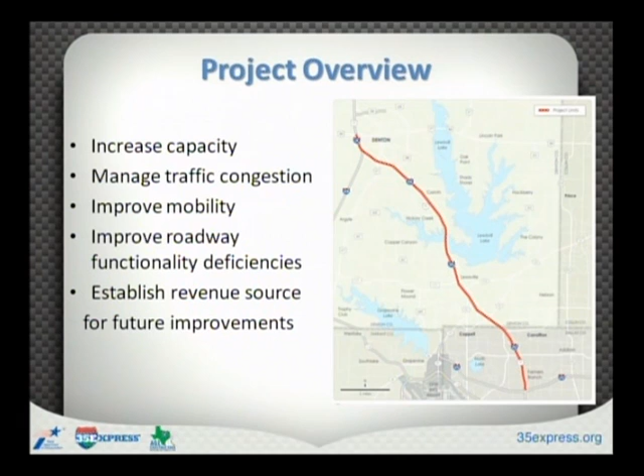Well, we all know that we are growing tremendously in this area, and our transportation infrastructure has to be upgraded to accommodate this growth. So the main purpose behind the 35Express project is to expand capacity, increase mobility, and also give us another way to fund improvements to our transportation system. We can't do this alone. We run through 2 counties and 8 cities, and we're working very tightly with them. We also work with the Federal Highway Administration, the U.S. Corps of Engineers, and the North Central Texas Council of Governments.

Now, this project is about 30 miles long. If you've seen me do this before, we've increased another couple of miles because we've got some additional things to build, which is going to be on this end of the project. We'll be building general purpose lanes, frontage road lanes, and of course, the reversible managed lanes.

Now, I know that you hear a lot about Phase 1 and Phase 2 construction. Phase 1 and Phase 2 are the same project limits, which means we're going to be building between 635 and US 380 down in Denton. However, Phase 2 is going to be built after Phase 1, and that means after funds have been identified. AGL Constructors has been contracted by TxDOT to construct Phase 1.

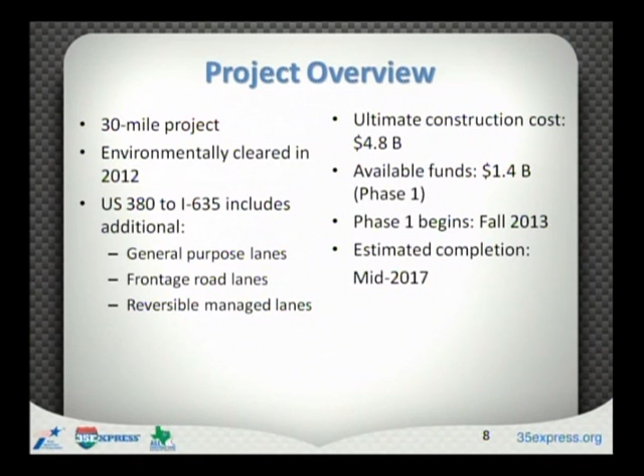If we were able to construct what we needed to do with I-35, it would cost us about $4.8 billion. We've only identified $1.4 billion of that cost, so we're doing those improvements in Phase 1 of the project. We should be beginning construction in the next few weeks and should wrap up about mid-2017.

What are managed lanes? Managed lanes are just basically toll lanes. They're going to be similar to your HOV lanes. With the managed lanes, you can have a 1-passenger car versus with the HOV lanes, you have to have 2 or more people in the car. When you're riding in the lanes during peak hours, it's more expensive to ride.

They are reversible, so it means they go one way in the morning and another way in the afternoon. We will have 11 different access points for people to get in and out. There's also shoulders for those who may experience car trouble while in the managed lanes. And then we also have perches along the way for law enforcement to watch traffic.

I'm going to go through the project a little bit. I'll go from north and then I'll hit south because I know that that area is a little bit more important to you. The north segment of the project goes from US 380 to FM 2181 or the Swisher-Turbeville area.

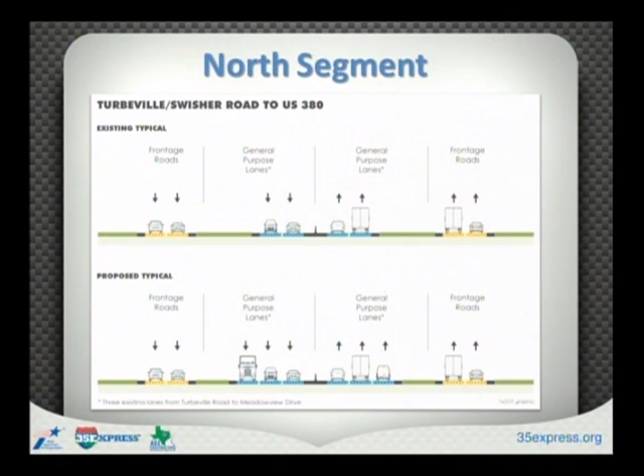There are not any managed lanes in this particular section of the project. At the top part, you'll see there's 2 lanes in each direction, and the bottom part is what the configuration will look like once we complete construction.

For the north segment, we'll be doing lots of new bridges. With this project, we touch about 75 bridges. Either we are rehabbing, reconstructing, or expanding bridges. Up north, you'll see new bridges at North Texas Boulevard, Corinth Parkway, and Post Oak. Once we complete construction, Corinth will flow under I-35.

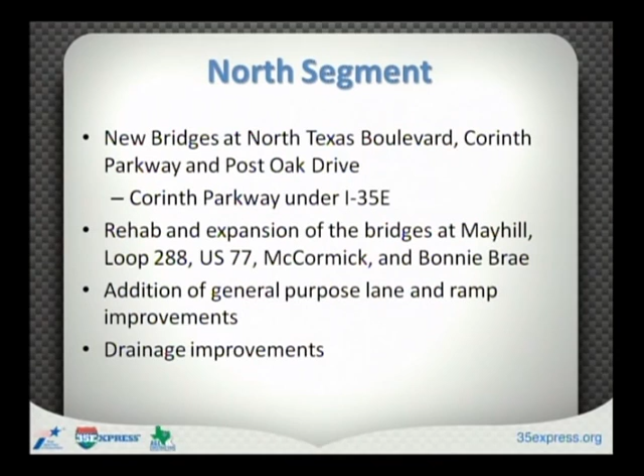We're going to be rehabbing and expanding the bridges at Mayhill, Loop 288, US 77, McCormick, and Bonnie Brae. And then, of course, as I mentioned earlier, we'll be adding additional general purpose lane and making ramp and drainage improvements. Early work includes work at Bonnie Brae, as well as drainage and culvert work near US 77 and Pennsylvania.

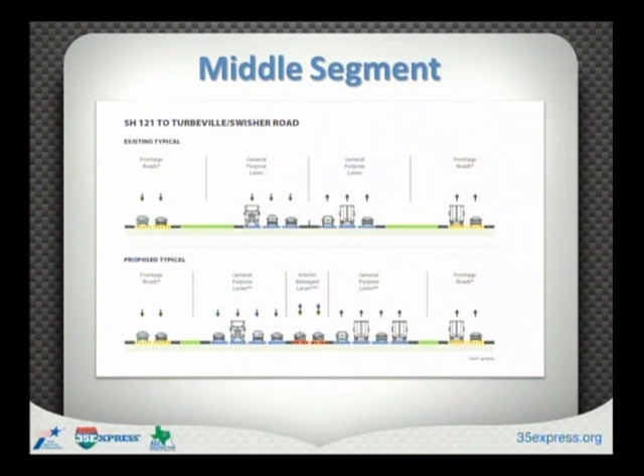Okay. And here, again, additional general purpose lanes, bridge improvements. We'll also be building a new southbound bridge across Lake Lewisville, which I think is the most exciting thing. And of course, adding access to the north side of the I-35 Sam Rayburn Tollway interchange.

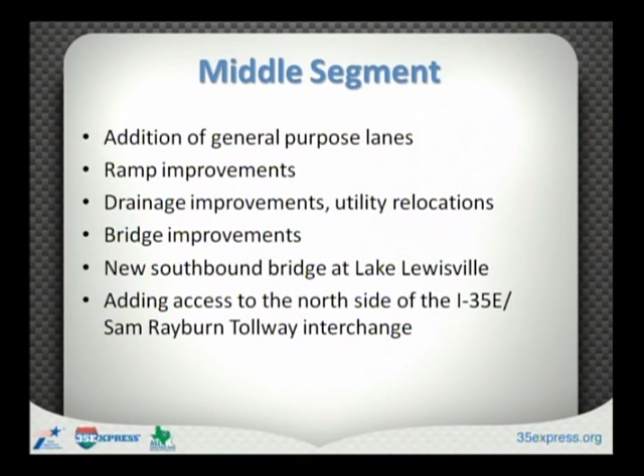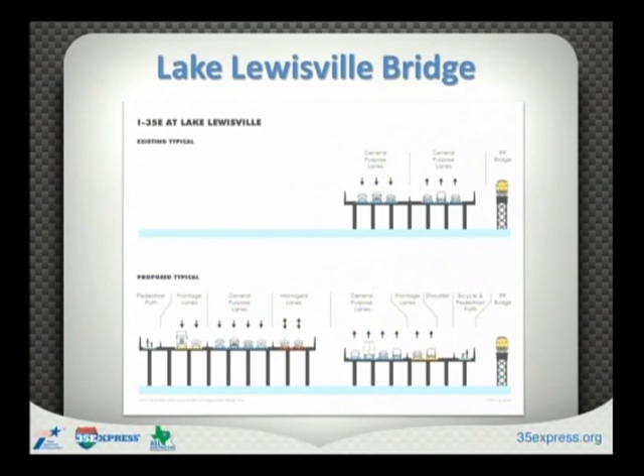Here's a cross-section of the Lake Lewisville Bridge. At the top is where we are now. When we get finished, we'll have 14 lanes across this bridge. There'll be 4 main lanes, that means 4 northbound and 4 southbound lanes. You'll have 2 lanes of frontage roads on each side, 2 northbound, 2 southbound, and then plus you'll have the managed lanes down the middle of the project. In addition to all of that, we will also have a shared path, which is for pedestrians and cyclists to get across the bridge safely.

In addition to the work at the bridge, we've got improvements at Copperas Branch Park, a new trail system, new parking lots. Many of you may have known that we closed the park down in September so that we can do construction, start on the bridge, stage equipment. We'll open that back up after we finish construction, but it'll be a new and improved park. You'll really enjoy it.

And again, we've got new bridges at Garden Ridge Boulevard and Fox Avenue. Garden Ridge is scheduled to begin work in spring of 2014, and then we're scheduled to begin work on Fox Avenue in late summer of 2014. Both of these will be brand new bridges. They'll have added capacity for traffic in that area.

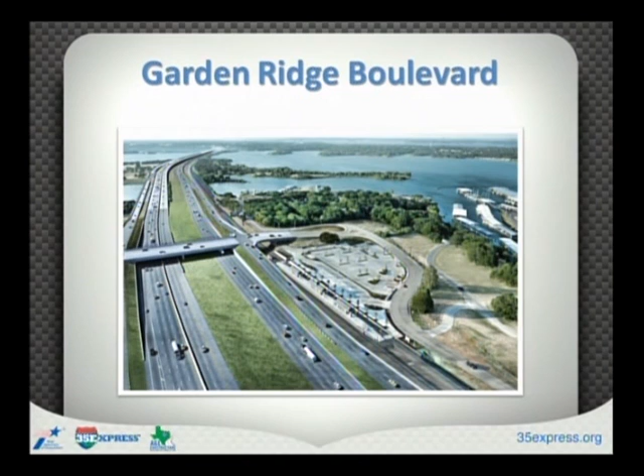Here is a rendering of Garden Ridge. If you look over to the right, you have the DCTA station. You can see the managed lanes and the general purpose lanes, and then the lake further at the top.

One thing that we love to hear when we go out, everybody talks about the FM 407 bridge. Oh, I've been waiting for 8 years. I've lived here for 8 years. I've lived here for 30 years. I'm waiting on you to fix this bridge. Well, we're finally going to fix this bridge. Yes, we're going to take the orange barricades off and fix whatever's been going on for the last 10 years.

When we start work in the next few weeks, you'll see our crews on the southbound frontage road along the side clearing and grubbing that area. And we expect to close the bridge in summer of 2015. Once we finish with FM 407, it will go under I-35 as well.

And then I mentioned additional access from the north side of the I-35 Sam Rayburn interchange. Right now, it's pretty easy to get around in that area if you're on the south side. But when we finish, we'll have new direct connector ramps on the north side.

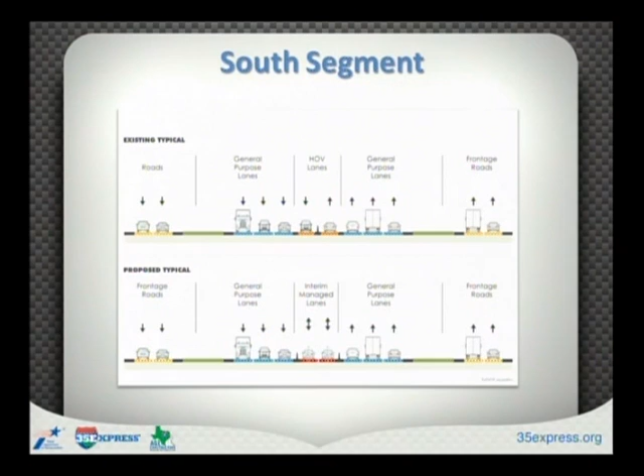The south segment, the segment that you've all come here to hear about, goes from President George Bush Turnpike to I-635. Here, you'll see we maintain our 3 lanes of traffic in each direction. We expand the HOV lanes to have the managed lanes. They will be barrier protected, so if you look at the bottom part of the slide, you'll see little barriers on the left and the right side. The managed lanes are underlined in red.

In late November, we expect to close the HOV lanes, and we'll be closing those between Whitlock and 635. So be prepared for that if you want to carpool or take DART or take DCTA. We'll also begin our bridge widenings at Whitlock, Crosby, Valwood, and Valley View. Now you'll see a little bit more work at Whitlock, because we're actually replacing the bridge deck there.

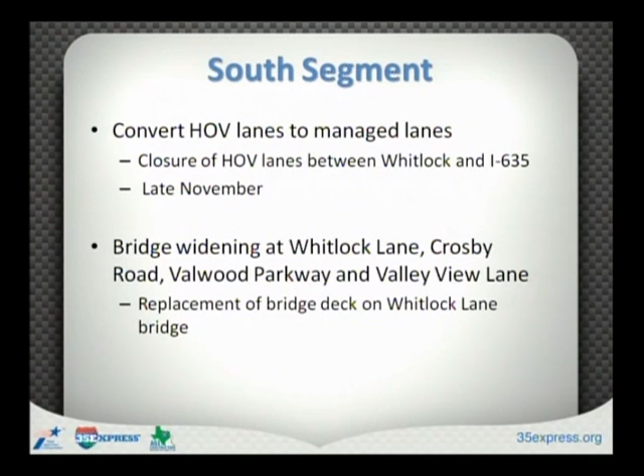New interchanges at Dickerson Parkway and Belt Line Road. Dickerson will be extended to the west. It will fly over the DART station and I-35 and tie into the PGBT. We'll also be adding access to north and southbound I-35 from Dickerson Parkway.

Belt Line Road, which is an interchange that everybody seems to be excited about. We're going to elevate that to the current height of I-35. We'll be elevating I-35 to about 25 feet above that. You'll see elevated frontage roads. And we should start the Belt Line Road work in December. And again, every time we do all these changes, we have to improve the drainage system and relocate utilities.

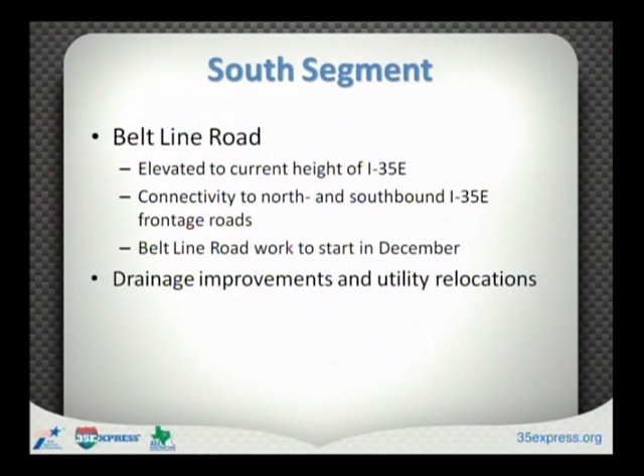Now, this new work that I mentioned earlier, new connections with I-635, we'll be having direct connector ramps that will connect the managed lanes from 635 to the new managed lanes of I-35. We'll also have a southbound I-35 managed lane to eastbound I-635 managed lane, extend the southbound I-35 managed lanes to Loop 12, Story Lane, and Northwest Highway, and then westbound I-635 to northbound I-35 managed lanes, and northbound I-35 managed lanes begin at Loop 12, Story Lane, and Northwest Highway.

Don't worry, we'll put this on the website, so you'll be able to keep up with all of that. But that's something new we recently received that pushed our time out a little bit more, and that pushed our mileage out about a couple more miles as far as the project.

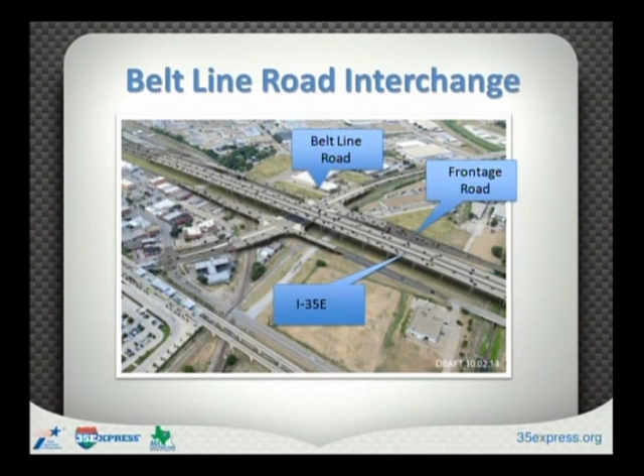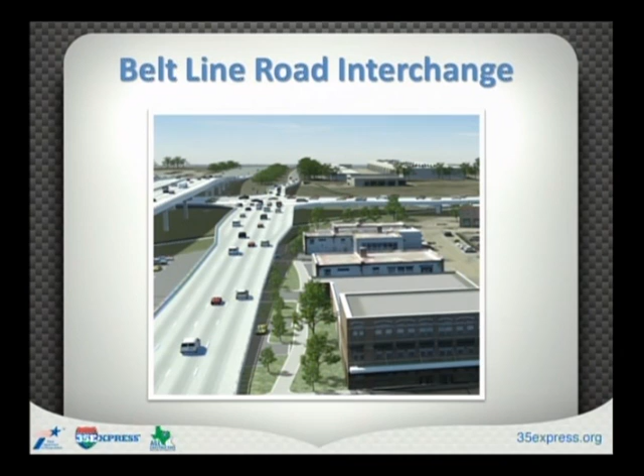Okay. Our outreach and communications plan: we do have a website, which is 35express.org. We have an e-newsletter. We sent our first issue out last Wednesday. Right now, that will come out every other week. So if you have not signed up for that, if you sign in today, we'll get you on that list. We'll also have text alerts, so if you left your phone number with us, we'll get you signed up for that. Our Facebook page is www.facebook.com/I35Express, and then Twitter is just 35Express.

We also have formed an external communications task force. As I mentioned earlier, we can't do it alone. We have to partner with the cities and the counties and the transportation agencies along the corridor. So this group meets monthly. We talk about what's coming up and the best way to communicate that information out to the public. We're in our week to do our community meetings. We'll have community meetings about twice a year to give you an update on progress.